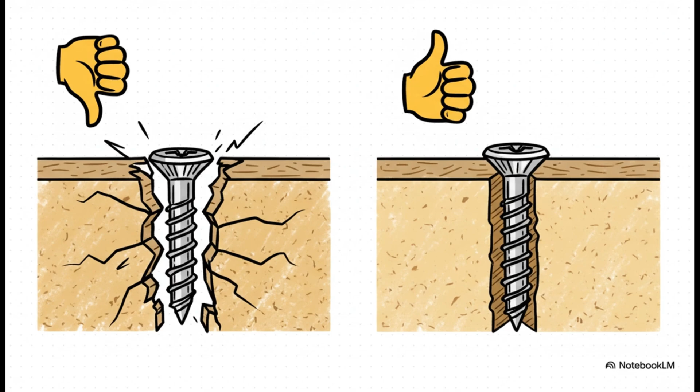So, what's the big secret to avoiding all that frustration? It's actually super simple. Using the right tool for the job. Just look at the difference here. On the left, a generic screw is basically just a wedge, forcing the wood apart. Total fail. But on the right, you see how that purpose-built chipboard screw just sits in there perfectly? It's not just a suggestion, it's the whole secret to getting that pro result, especially with materials like chipboard, MDF, and particle board.

Okay, let's really get into it. To appreciate why these screws work so incredibly well, we've got to break one down piece by piece. We're going to go from the head all the way to the very tip, and you'll see the engineering genius that's packed into this little guy. Starting right at the top, you've got the head. Most chipboard screws have this countersunk design. That's the angled shape that lets it sit perfectly flush.

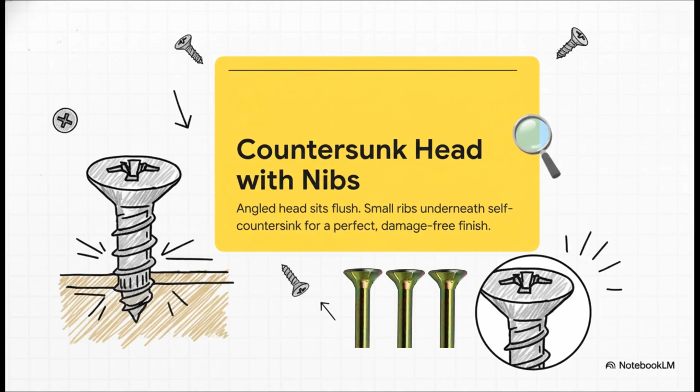But here's the magic trick. See those little ribs underneath? Those are called nibs. As you drive the screw home, those nibs act like tiny little cutters, literally carving out the perfect little pocket for the head to sit in. This gives you that absolutely flawless finish with zero extra work. It's brilliant.

Now, how you actually turn the screw is just as important. Over on the left is the Pozidriv drive. It's super common in Europe, and it's fine. But it can slip when you really put some torque on it. That's what we call cam out.

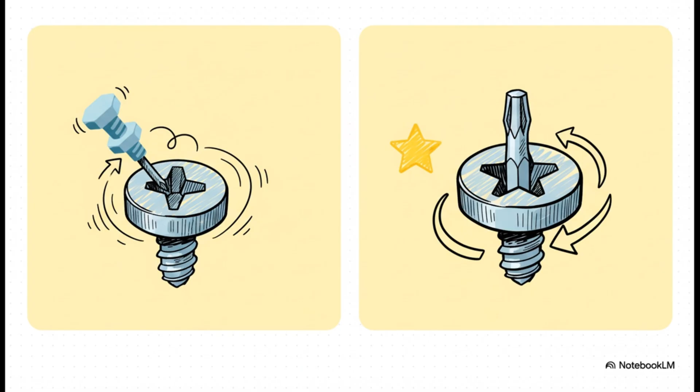But on the right, you've got the Torx drive. And honestly, this is the upgrade. The engagement is so much better, it transfers power like a dream, and it basically makes slipping impossible. For any serious DIYer, switching to Torx is a total game changer. No more frustration.

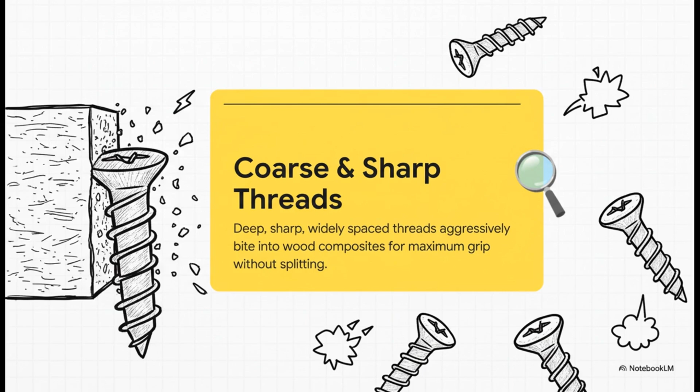Let's talk about the real engine of the screw, the thread. Chipboard screws pretty much always have what we call coarse threads. That just means they're deep, they're sharp, and they're spaced far apart. And that's not by accident. This design is specifically engineered to take a huge aggressive bite into materials like particle board. That wide spacing gives the wood dust somewhere to go, which means you get incredible grip without building up all that pressure that causes those dreaded splits.

Okay, let's clear something up because this trips a lot of people up. You'll hear the terms self-tapping and self-drilling, and it's so important to know they are not the same thing. Self-tapping just means the screw cuts its own threads as it goes in, and yeah, pretty much all chipboard screws do that. But a self-drilling screw, that has an actual drill bit on the end. Those are for metal, and using one in wood is a huge mistake. It just drills out too much material, leaving the threads with nothing to grab onto. You end up with a super weak joint.

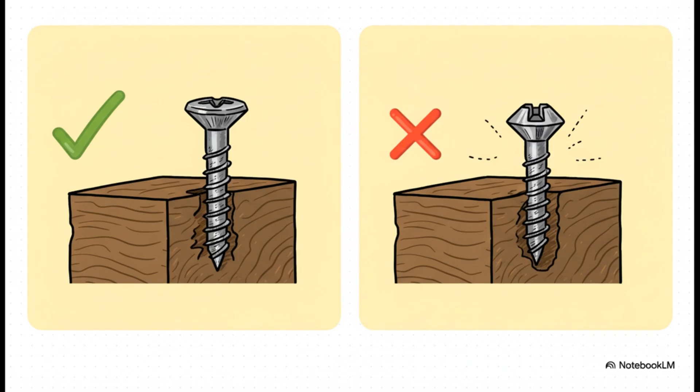And finally, let's look at the very tip. A lot of high-quality chipboard screws have what's called a Type 17 point. And this thing is a fantastic innovation. It's got a super sharp point with a little cutting notch carved into it. This little detail acts like a mini drill bit, clearing away the wood fibers as it goes in. That makes it easier to drive, and most importantly, it massively reduces the risk of splitting the board. A lot of times, it means you don't even need a pilot hole.

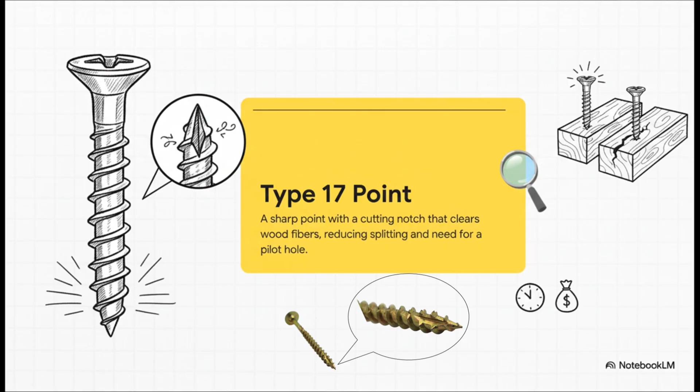So, we've got a screw that goes in clean and holds on tight. But what keeps it from rusting and makes sure your project is going to last for years? Well, that's where coatings come into play. This table breaks it all down nice and simple. The coating you choose really needs to match the environment, which in Europe we define with service classes. So for your indoor furniture, basic zinc plating is perfectly fine.

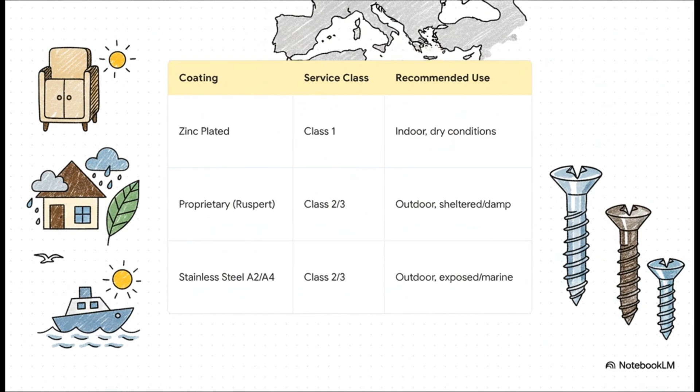If you're doing a project in a kitchen or maybe a sheltered deck, you'll want to step up to a better proprietary coating. And for anything that's really out in the weather, especially near the coast, you absolutely need stainless steel. And this chart, wow, this really tells the story.

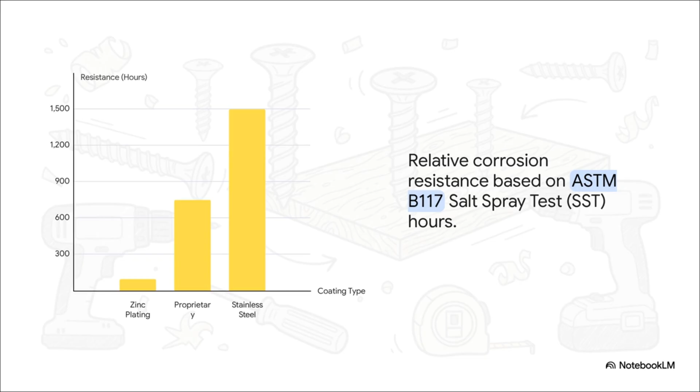It shows how long these screws last in a salt spray test, which is basically like hyper-aging them. A standard zinc screw gives up after about 96 hours. A good proprietary coating? That gets you 500, maybe 1,000 hours. And stainless steel? Well, it's just in a whole other league, lasting over 1,500 hours. This is why picking the right coating isn't just a tiny detail. It is crucial for how long your work is going to last.

All right, enough of the theory. Let's make this practical. In this next part, we're going to take all this knowledge and turn it into some real-world, actionable tips that you can use on your very next project.

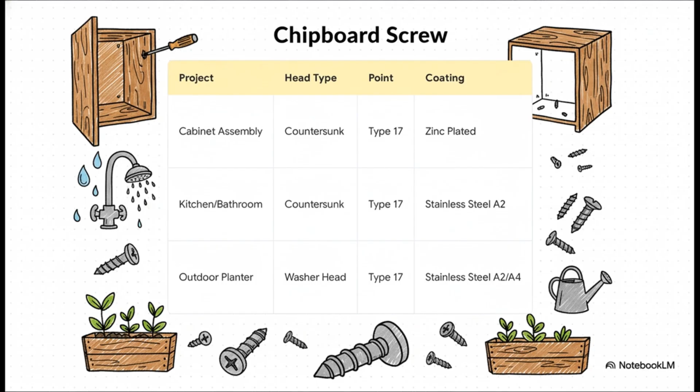You can basically think of this slide as your project cheat sheet. Building some indoor cabinets, a zinc-plated countersunk screw with a Type 17 point is your best friend. Doing a job in a kitchen or a bathroom where there might be some moisture, you'll want that same screw but made from A2 stainless steel. And for something like an outdoor planter box, a washer head screw in stainless is going to give you the serious holding power and rust protection you need. It's a simple guide to getting it right every single time.

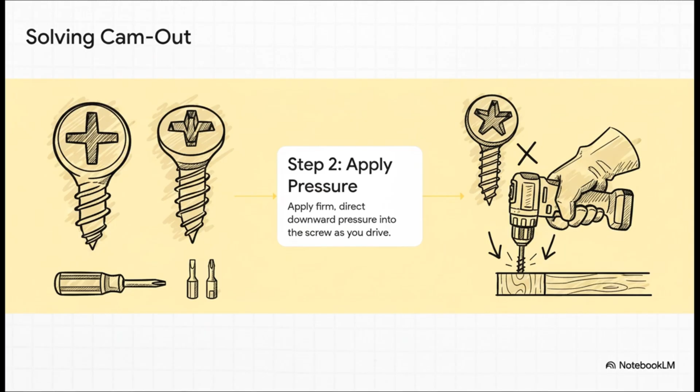Okay, let's talk about one of the most annoying things that can happen, the dreaded cam out. That's when your driver bit just keeps slipping and jumping out of the screw head, chewing it up in the process. It's the worst. Here's the fix. First, just double-check your bit. Are you absolutely sure you're using a PosiDrive bit for that PosiDrive screw? It's an easy mistake. Second, make sure you're applying firm, straight, downward pressure as you drive. And for the ultimate solution, just buy Torx screws next time. This whole problem literally becomes a thing of the past.

And here's the other big one, the one that can ruin a really expensive piece of wood in a split second. You're driving a screw near the edge of a board, and you see it start to split. That's a heartbreaker. The moment you see a split starting to form, just stop. Stop driving. You're probably just a little too close to the edge. The best fix is to back the screw out and just pre-drill a small pilot hole. That gives the screw a clear path and relieves all that pressure. Now remember that cool Type 17 point we talked about. It's designed to help prevent this. But when you're working really close to an edge, pre-drilling is always the safest bet.

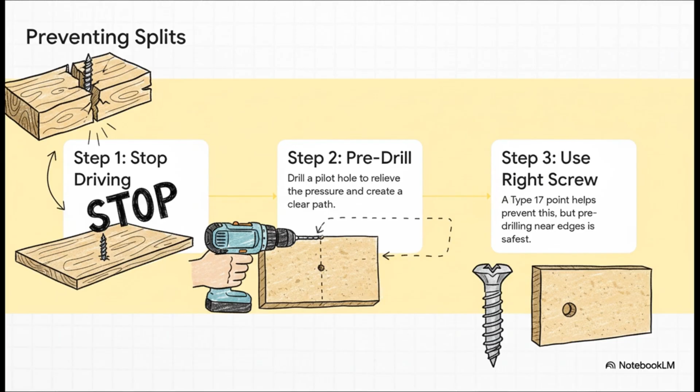So as we wrap things up here, it all really comes down to this one simple idea. The right screw makes all the difference. It's not just a fastener, it's a little piece of engineered problem solving. It's designed to let you build things with confidence and create projects that are truly built to last. And that kind of leaves us with one final thought, doesn't it? We've just spent all this time geeking out on the incredible design inside a simple screw. It really makes you wonder, what other simple tools in your workshop, the ones you might not even think about, are actually amazing feats of engineering?